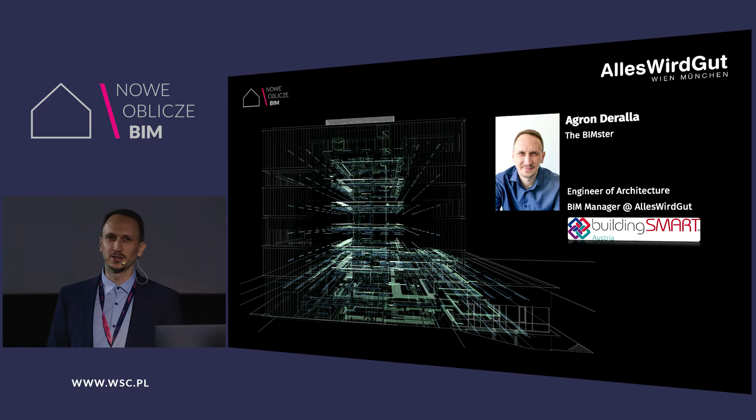My main tasks in the office are BIM coordination and collaboration with our external consultants, but also internal processes of management, internal structures, and process definition in the office. In addition, I'm a member of the buildingSMART Austrian chapter for software implementation. And since during the day I talk a lot about BIM, in the office I'm also known as the BIMster.

Who is AllesWirdGut? We are an architectural company, around 70 friends working closely together in Vienna, our main office, but we also have a smaller office in Munich. We design and develop all sorts of projects, like the Doppelmayr headquarters in Austria. Doppelmayr is one of the biggest cable lift producers in the world, so whenever you're skiing somewhere, you're probably taking a Doppelmayr ski lift. Or the Funke Media office in Essen, one of the biggest publishers, like the Westdeutsche Allgemeine Zeitung.

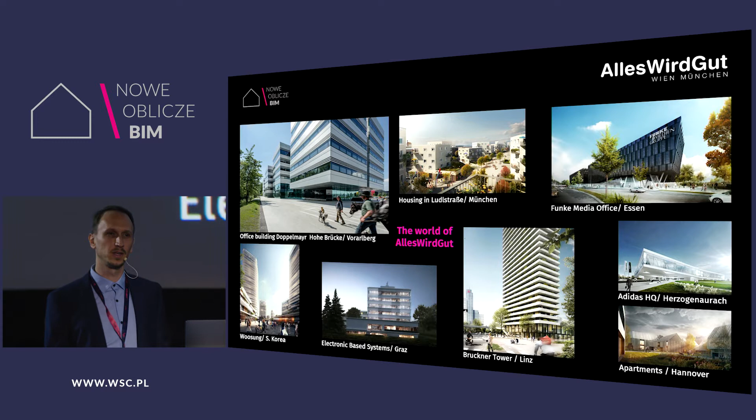We also develop housing for 300, 400, 500 units, or institutional buildings, schools, industry, actually everything interesting in the market. Not all of these projects are BIM projects, and this is the reason why. In Austria, the government invests quite a lot of money in the building sector, including infrastructure, of which almost 40% belongs to the public sector. In the city of Vienna alone, there's a program over the next 6 years to approve 430 projects, enabling around 21,000 living units. These are big numbers, but the market in Austria is maybe not as developed as in other European countries. Therefore, BIM accounts for only around 20% of these projects.

So we as planners ask ourselves: if we don't get contracted in BIM, should we do it in BIM? And the answer is yes. There are some first steps to consider. If you're contracted in BIM by an investor, it is crucial that the investor takes the initiation phase. BIM begins there. In the initiation phase, he decides why he needs this project in BIM and what his goals are, and it's important that the whole team, including the end user and facility management, sits at the table from the first day, defining the structure and how it will be used during the operation of the building. Based on this, the EIR, or Exchange Information Requirements, is created, which is a contractual document for the planning team.

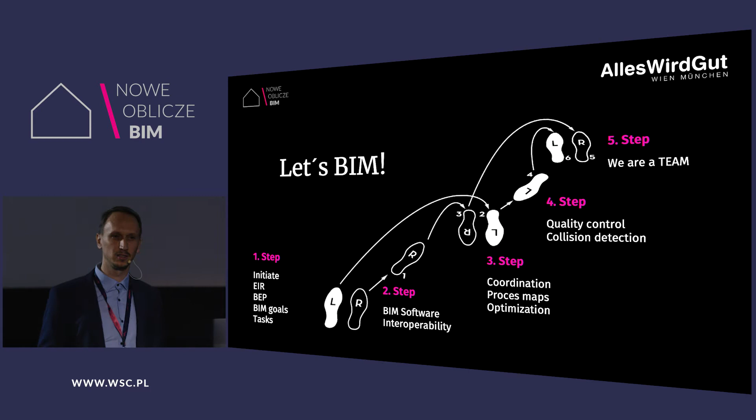So today's example, I'm going to present to you our project called Electronic Based Systems Center, which has been contracted by Bundesimmobiliengesellschaft. It is a state-owned company developing and maintaining buildings in Austria. And in this case, the user was the Technical University of Graz. It is a relatively small building with roughly 5,500 square meters gross area with 7 stories.

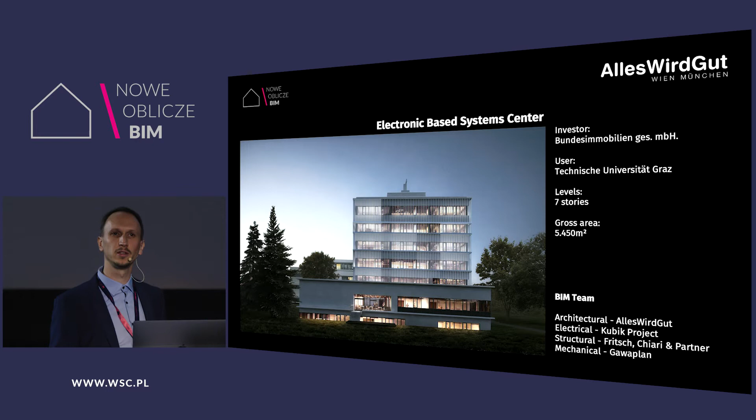But from inside, it is a bit more complex because we're dealing with an institutional building dedicated to microchips and microelectronics. So there are a lot of laboratories and experimental rooms. So the mechanical part was really crucial here to stick to the building and to the concept. This is not a project contracted in BIM, but nonetheless, our BIM team has decided to develop it in BIM. So we have the architectural team, the electrical, structural, and mechanical engineers developing this project.

So if you Google BIM, you'll probably see a lot of 3D models, collisions, and beautiful colors. But in my opinion, BIM is not only 3D models. It has to do a lot with processes. So if you define the processes of how you're going to develop this BIM project, you're going to be more effective. Therefore, who, when, and how this stuff is going to be developed.

So imagine a project is like a cloud. In the beginning, you have a relatively small cloud with a few tasks. The deeper you go into the project, of course, the cloud is going to get bigger, meaning that you have more tasks which are also more complex.

Therefore, it is necessary to find the best way to develop these processes, which can be the whole project, a part of a phase, or a small process that is going to repeat itself inside the project multiple times. And in this case, we use already existing norms in the market, the ISO norms like the 19650 Part 1, or our local norm in Austria, the 6241 Part 2, enabling the development of projects in BIM Level 2.

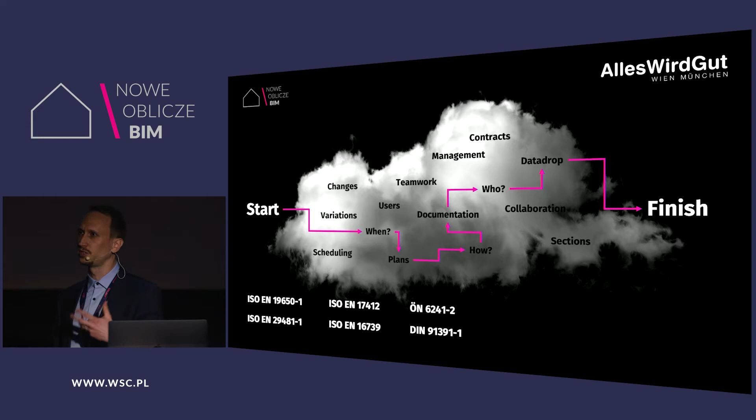So talking about norms, there is one organization dedicated to developing these norms, which is buildingSMART International. And buildingSMART has its own local chapters in each country, which I mentioned before. I'm a member of the Austrian chapter. But it is also interesting that Poland is one of the newest members in buildingSMART. So actually everybody here in this room can join buildingSMART and dedicate their work to developing all these standards in order to have better processes.

So when we have these processes, then we define activities for each discipline: who is going to do what at what time, which data format is going to be delivered, who collaborates when, what if something goes wrong, how the process then has to repeat itself. So these BPMNs, or business process model notations, help the whole team to develop the project accordingly, whether it is a small process or a big process.

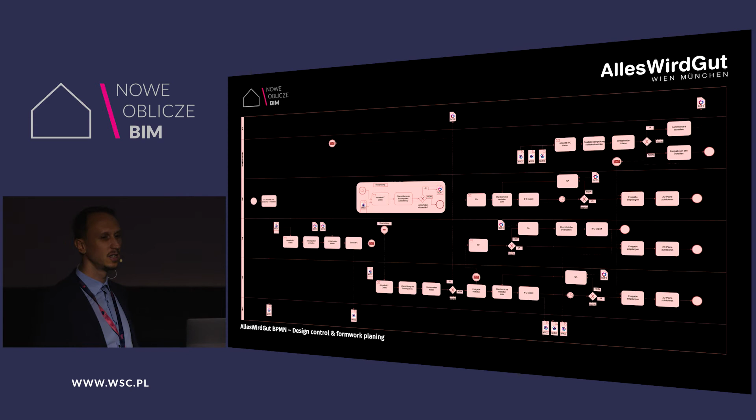So we have a lot of these BPMNs such as the information exchange and the quality control, or more complex BPMNs like for the design control and the formwork planning. These activities are then documented in a digital way for our process management, which is in a Kanban. And each activity gets a card. So you're going to shift the card from process to process until it lands in the basket, until it's done. So this raises the transparency throughout the team because everybody knows exactly at which moment what the status of the project is, how it is developing, who is responsible, and how it should go further on.

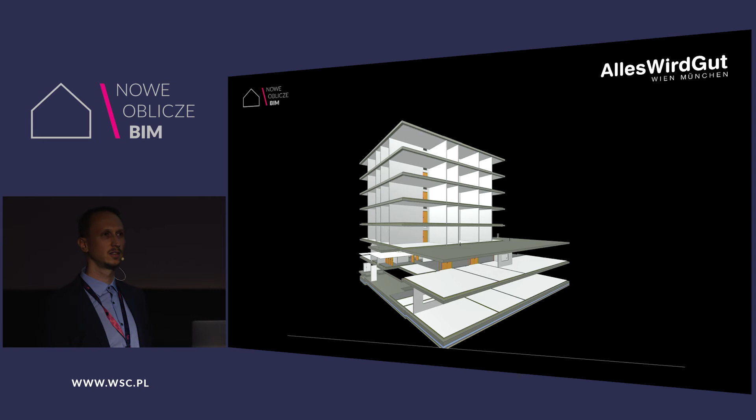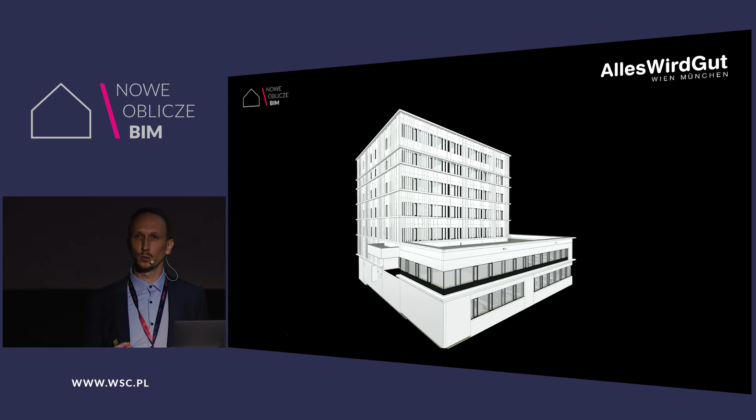So these were the processes, and now we're going to dive into the modeling. So modeling is important in BIM, therefore the architects deliver their first models, in which case they do walls, doors, slabs, stairs, actually everything that is necessary for delivering a reference model or also scheduling. In the next case, we have our structural engineer who models then his load-bearing components.

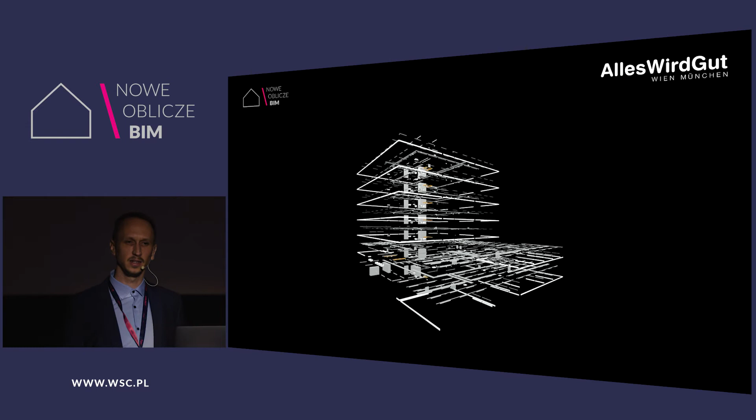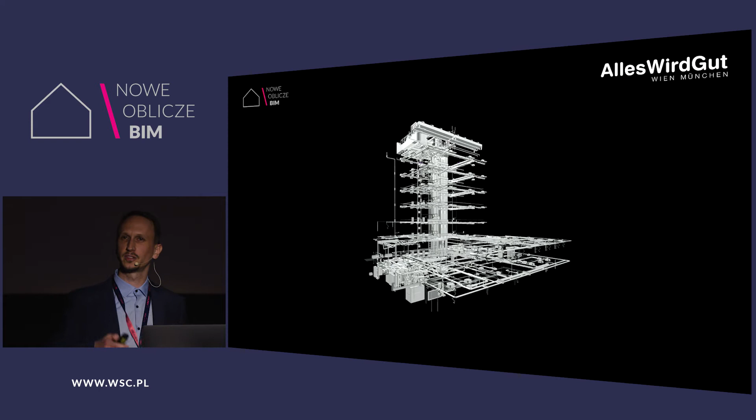Then the electrical engineer delivering cable carriers, servers, emergency lighting, everything that is necessary from his side. And in the end, we have our mechanical engineer who delivers the air ducts, the water and sewage system, heating and cooling, up to some devices like fan coils or some funny shape-looking devices for suction in the experimental rooms.

So in this case, everybody, as I mentioned, is working in their own preferred software, and we're delivering IFC data. So this data is not only 3D geometries, but we're also delivering metadata. That means that all these 3D geometries have information inside them, what is the fire classification of this door, or is this wall load-bearing or not, or this floor is flammable or not. So all this information can be exchanged throughout the whole team.

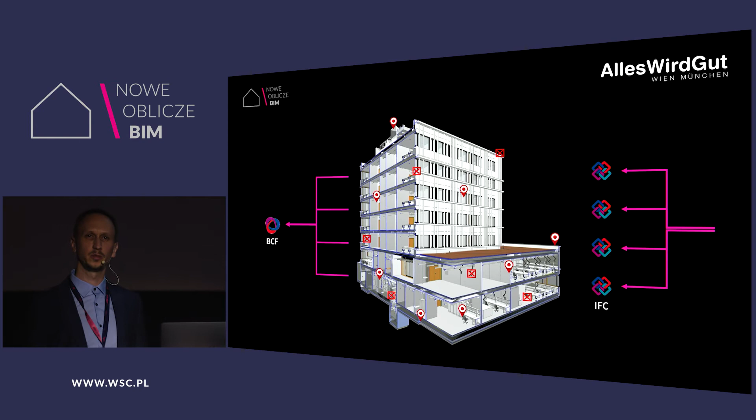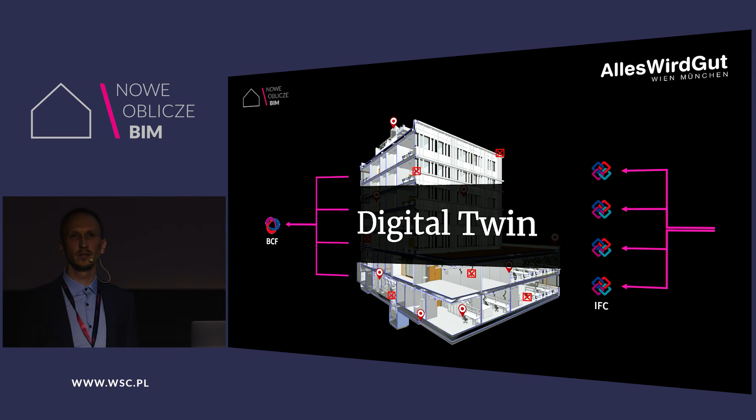On the other hand, if we notice something is wrong with a project and we need to talk about it and communicate, then we use the BCF or BIM collaboration format. And in my opinion, this is the case where the digital twin actually starts its first steps, because this is the creation of the structure that is going to be used, or hopefully someday is going to be used in the exploitation phase of this asset.

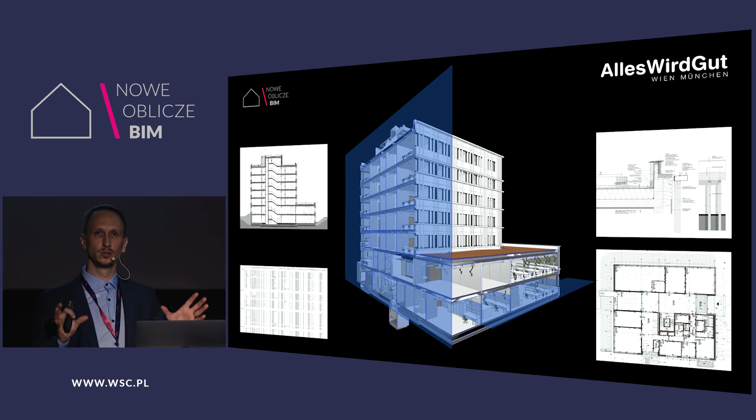Since we are living still in Austria, not all companies are, let's say, BIM ready. Therefore, it is necessary to deliver also 2D documentation. Therefore, the BIM model serves as a source of delivering this documentation. So there are floor plans, sections, elevations, scheduling, and also partially 2D documentation. But it is important that we don't have a parallel world of the 3D and the 2D working together, but everything has to come from one single source.

Model position. I get this quite a lot of times from other BIM managers or other architects that Open BIM does not work because the models don't sit in the correct position. Well, that might be true, but the answer to this is failed coordination in the beginning of the process. If you coordinate your models in the beginning, then they will sit accordingly, because also the IFC structure is so structured that you can validate the position of the models based on their IFC local placement.

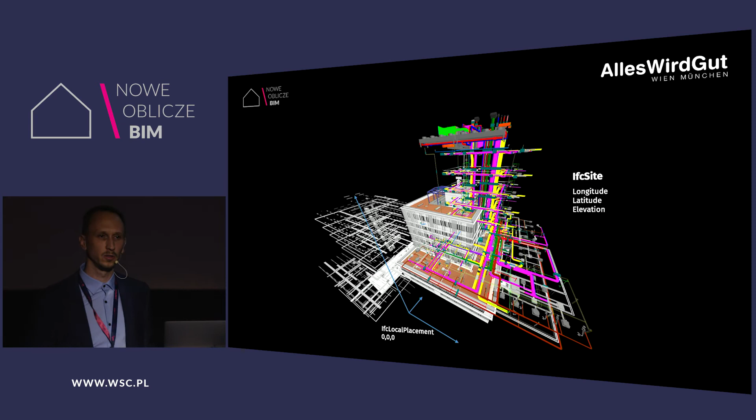Another mystery is the level of geometry. I'm familiar with some consultants that are keen on modeling very complex devices, like in this case, this fire detector that has hundreds of polygons. Well, in this case, as a BIM manager, I say, no, sorry, you cannot deliver this thing, so I have to reject this model and say, please deliver a more simplified version of this component.

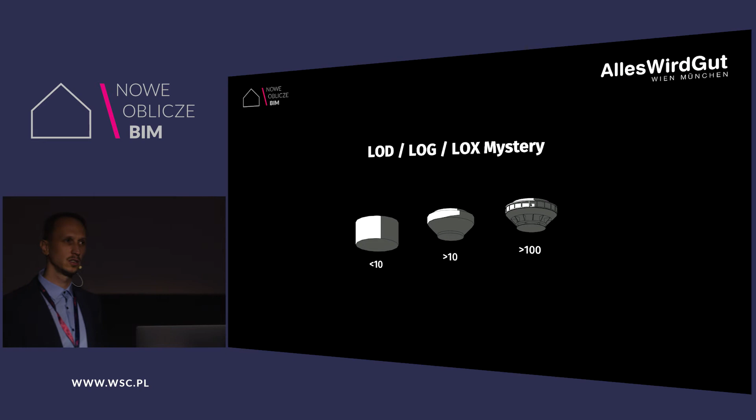In my opinion, it is important that the component has its approximation of the volume for positioning, for collision detection and scheduling. But more important is that this component has its metadata embedded inside. So like in this case, we have the property set for electrical devices, like a power factor, IP code, rated current or voltage, which can be also communicated throughout the whole team.

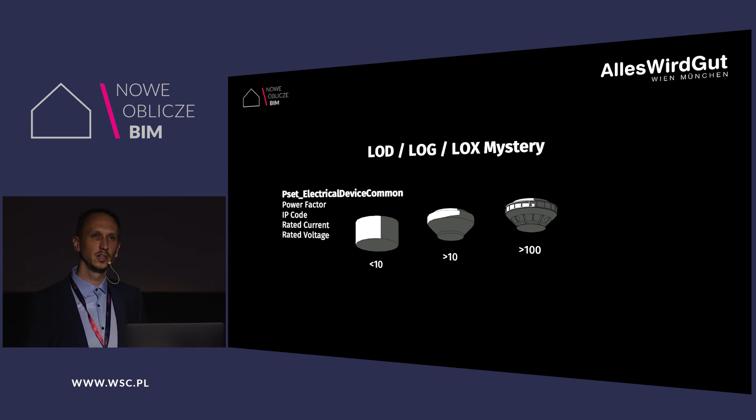So these attributes are already embedded in the components and they can be validated and visualized, as we did for the fire rating system approval of whether all fire safety doors are sitting in fire safety walls, because the other way around, fire safety doors in non-fire safety walls doesn't make any sense. Or we also controlled and validated if our components are load-bearing, because we needed exchange with our structural engineer. So every load-bearing component had to have its appropriate attribute.

And another factor is the furnishing, which in this case, the end user or the technical university is going to move in with a partial existing furnishing. So the other half had to be ordered. And in this case, the relation between the space and the furnishing helped us allocate where this furnishing, new or old, is going to be placed.

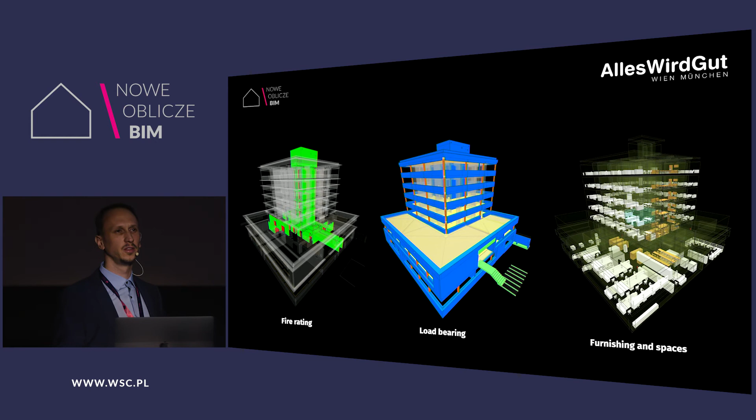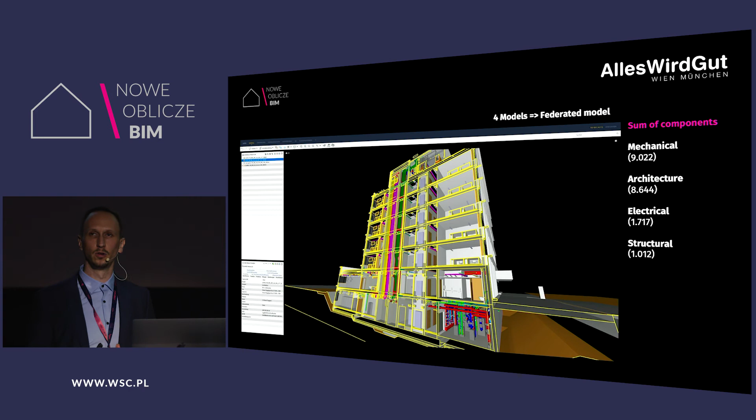So you see that the quality of these models is very crucial, and that's why you need also quality control. And if you do quality control of your models, then for sure I can guarantee you're going to sleep better at night. We did all quality controls in Solibri Model Checker, where we federated all 4 models. And we did a lot of automatic validation, like the model position, geometry, tolerances, collisions, attributes. And also an important factor is we tested the buildability. Already in the planning phase, we tested, is this building buildable? Parts of the building or the whole structure itself.

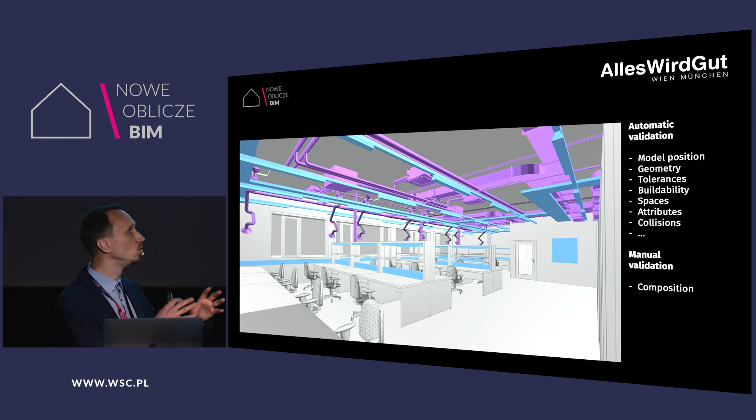As you can see, the wish from the architecture team was to leave the mechanical part visible. Therefore, manual validation was also important for the architectural team, to walk inside this virtual building and control and check if all the components are sitting as they wished.

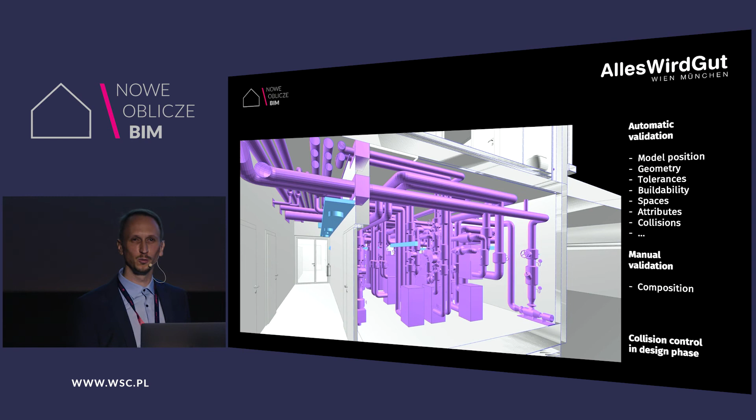Another aspect is the optimization, where the mechanical engineer achieved a very optimal room for the central heating, which he did in collaboration with a structural engineer, an architect, and partially also a building physicist concerning the acoustics. This might look like there are a lot of pipes here, but believe me, there is space for the maintenance staff to walk between the pipes and maintain all the necessary components.

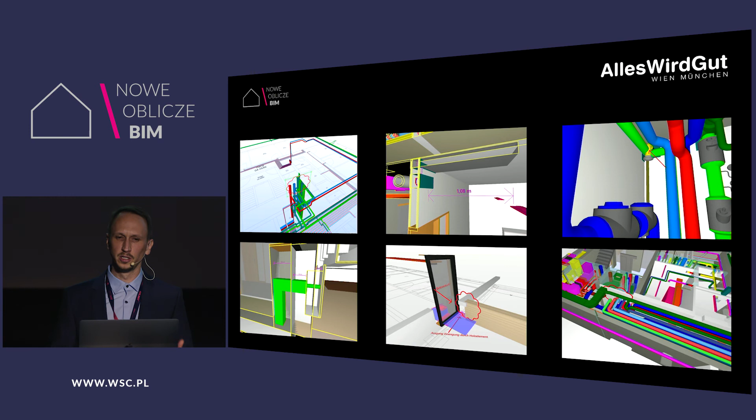So our communication then took another dimension, of course. We were talking about specific places, all the collisions and buildability, and all these issues were documented in BIMcollab, which gave us a centralized database of issue management, and everybody in the team had access to this database. So the transparency in the communication was really big, because everybody knew exactly at which moment which issues were open, which needed discussion, which needed approval, and BIMcollab also allows, based on these diagrams, to see how the workflow of issue management is going.

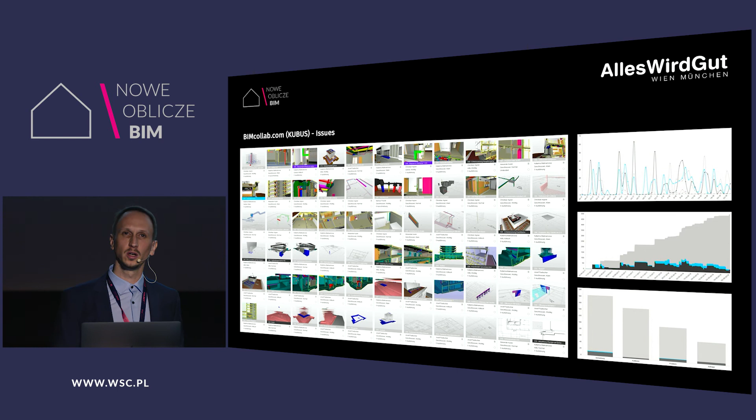Another example or success story of our project is the communication and collaboration concerning the formwork planning and rebar planning, which we all did in IFC. Thanks to our BPMN process definition, it was clear for the whole team how this process would take place, because you need this process for each story. The mechanical and electrical engineers were delivering their data. Then it was clear based on the BPMN who would give the approval and when the architect would open the voids inside his own model.

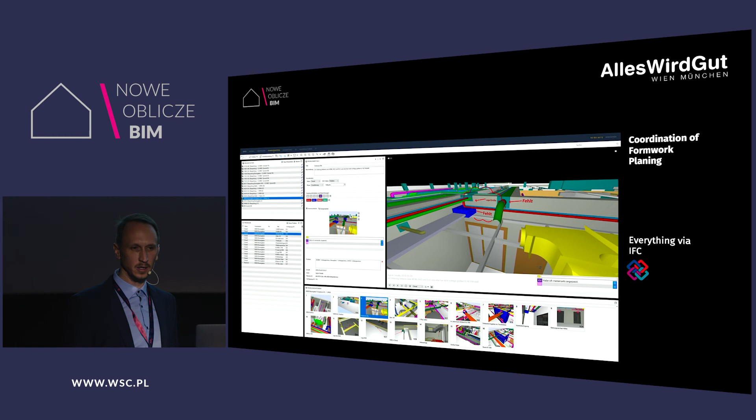Therefore, our meetings then took another dimension, because we were not talking on paper anymore, but projecting our virtual building on the wall and walking inside it. And this raised efficiency, because in our meetings we could really solve a lot of problems and concentrate on other aspects.

For this project, which took a year and some months, we solved more than 600 issues, of which 30 were very critical and could have negatively impacted the construction site or the construction of the building. We also found more than 200 collisions. These might not look like big numbers, but I have realized that there was good management inside the team, because we were working as a team, the coordination of these issues was efficient, and the knowledge of our consultants was not at a basic level; they were already a little bit experienced, meaning they were delivering cleaner IFC files.

The construction site began in October last year, and by that time the whole team had delivered all necessary documentation for the construction site, meaning construction documentation, detailed planning, formwork, and rebar planning, which, from my previous experience, is usually delivered on site moments before the concrete is poured, which is actually quite late.